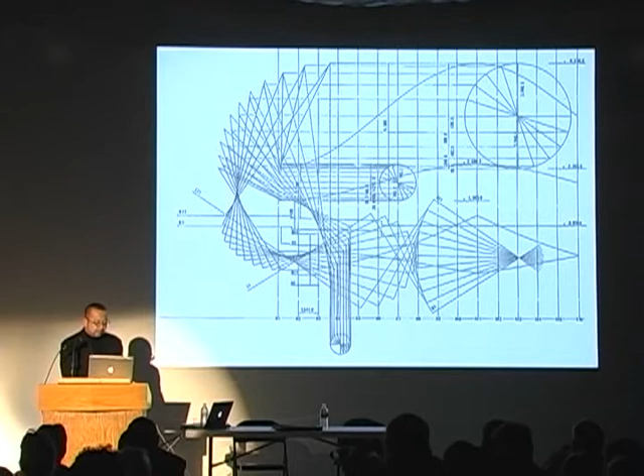And this is a drawing to form the shape of the handrail, let's say. So the bridge became sort of like a landscape created by geological activity.

So this is how it's located. Many people like it, but many people also hated this bridge. So I'm not sure if it was quite a successful project or not.

The other project is the interior of a restaurant, completed in 1999. This restaurant is located on the second floor of the building. The owner wanted to have a facade which is unique so that people will be attracted to come in. But since he doesn't own the building, he couldn't do the facade. So we proposed to do some sort of interior facade to enhance the experience of guests walking along the passage to the table. So this is what it is.

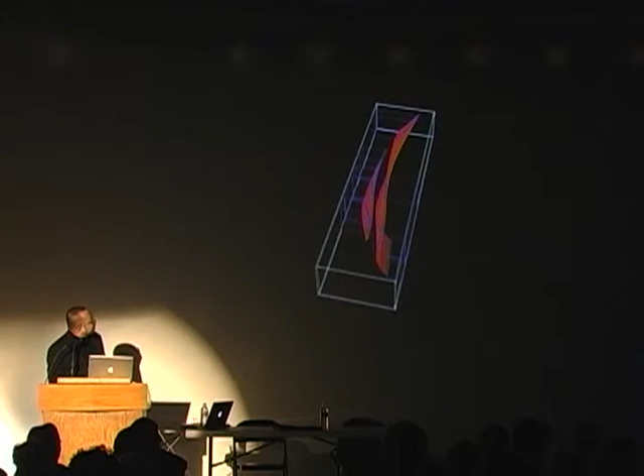And again, this is a diagram. We placed the corridor in the middle, and then there's lots of function located around it, and there's like a kitchen space and restroom and bars, etc. And because of the size of the space required, the corridor started to be curved, and then there's existing piping and structures, so the whole wall had to be kind of warped. And this is how we generated this kind of landscape of the wall.

And this is a drawing showing how we actually define the wall.

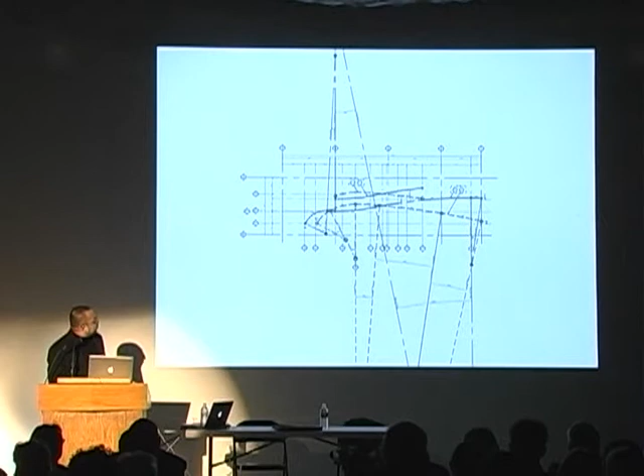And this is an entrance, and you were walking in there, and then there is a bar. The restaurant was quite a big success, but the problem was you feel already drunk before you drink anything.

Building type — just like a standard step for dancers, building typologies are a very effective tool for designing public facilities in which the identity of the end users is not known. However, over-reliance on them will ultimately restrict individual freedom of action, so they must not be the only models. Typologies may be an expedient starting point for design, but they are not the endpoint.

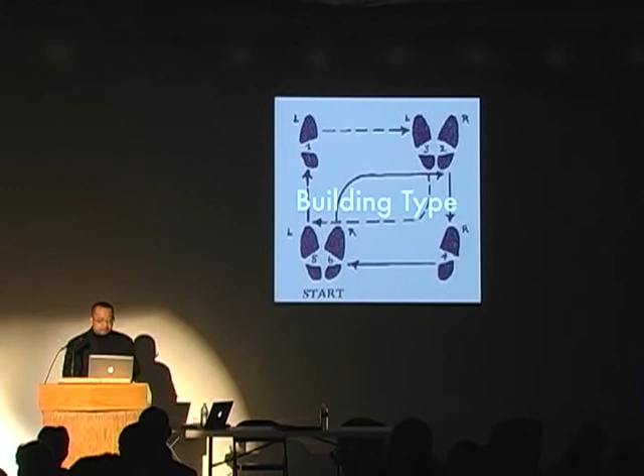So far, in designing a public space, an important point is to create a place that accepts a variety of activities by shifting pre-existing typology. The uniqueness or the vitality of the dance can be produced by an improvisation when you get rid of the standard.

So this is the Miyagi Stadium, and this is the reason why I left LA. Its design was done in 1992 and construction completed in 2000. It is a multi-purpose stadium for many kinds of sports, but it was built to have a World Cup in Japan. As you know, I'm a big soccer fan, so I was very happy when we got this project, because Japan lost against Turkey here in this stadium, in front of me.

The main concept of this stadium is a fusion of landscape and architecture. Since ancient times, the main function of the stadium typology has been to allow the maximum number of people to witness the event they contain, giving them the characteristic of centripetal closure. Additionally, a high priority for building performance at large-scale events is how to move people safely and according to plan.

And this aspect has gained even more importance today. However, the importance of everyday events that occur in modern public space is also increasing. In order to revitalize this kind of small event, the issue is now how to make an institution more open and free. In this project, for an architecture typology with an essentially closed character, the aim was to propose an open place without losing any functionality.

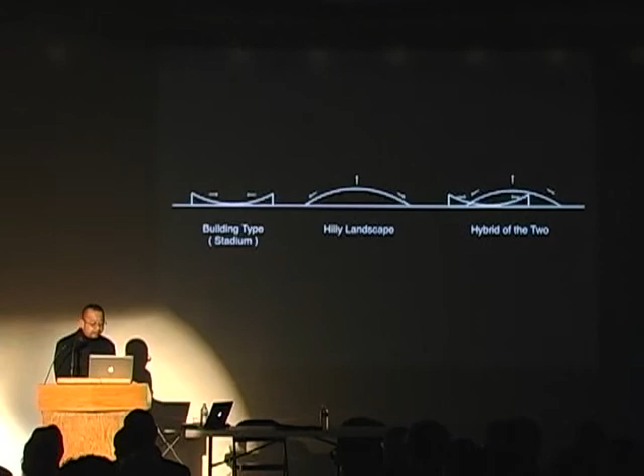So this is a photo. As you can see, the stadium is really fused into the hill. Sorry, there's more green now, but this photograph was taken a long time ago. This hill was designed as a kind of park where people can walk or have a picnic, and this function of the park was extended through the stadium with this skywalk. And because of the configuration, the structure of the backstand is basically lying onto the earth, so that we could save a lot of money.

And this is a drawing to show how the landscape can be combined with the geometry of the building. So this is what we did — we couldn't get these projects, too bad. And as you can see, the geometry of the landscape is sharing the same geometry with the building.

And this is a drawing. Okay, the roof, main entrance to the stadium. You can see how big the stadium is — this is a human, so. This is the interior racing track.

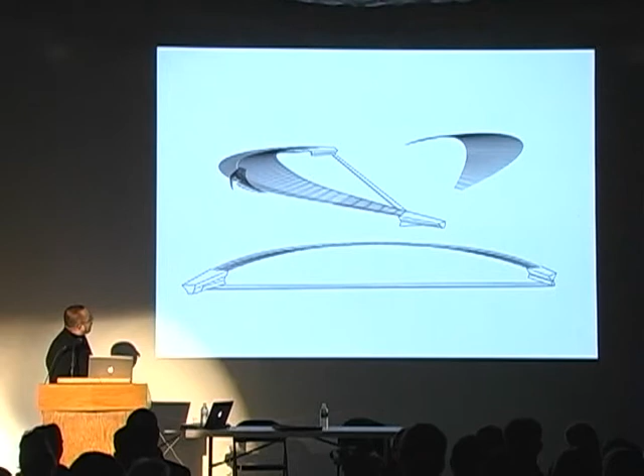So the roof of the backstand has a form that follows the overall organization, but the main stand has a kind of roof which flies over the structure and sticks out to the landscape. This becomes the main motif of the stadium.

Night view. After this stadium, we were wondering about the importance of doing public buildings, because this kind of big event doesn't happen so much. After 2002, nothing big happened in the stadium we designed, so we were kind of depressed. Then we got this commission, so we took a totally different approach.

This small facility fuses an auditorium and community center for a small town in Kyushu, in south Japan. I think it's important to define the proper size and program in designing a small public facility like this. In Japan, many public buildings end up costing too much to build and maintain, and aren't used so much.

But the biggest problem is that some of them exist totally disconnected from the surrounding community. The aim of this project was to make a compact, high-efficiency box that allows multiple usage. I wanted to get away from architecture consisting of a series of rooms corresponding to each function.

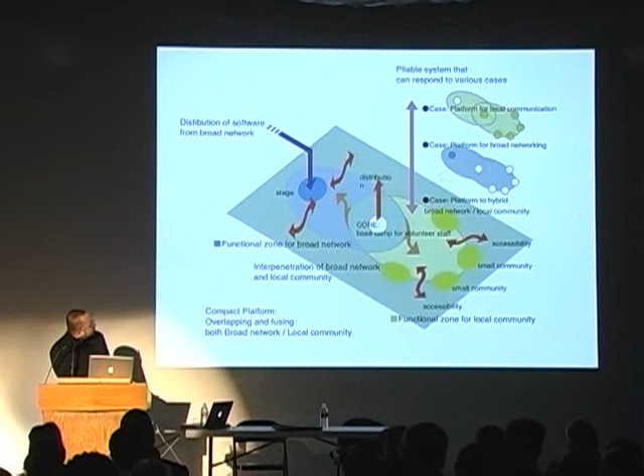Conceptually, we wanted to create a very open box without division into rooms, but planted with the seeds of many different activities. This is an activity diagram, so you can see that sometimes the auditorium function takes over everything, sometimes the community hall function takes over everything, or they share the space.

This is the plan. This is a diagram showing the generation of the form. The space of the building is a combination of one big space where all the main activities are focused.

And then a collection of smaller volumes for the various sub-functions. Those small volumes were fused into the main volume. Then these spaces are enveloped with wooden walls shaped like gills of fish, resulting in a continuous, gentle articulation of the single box.

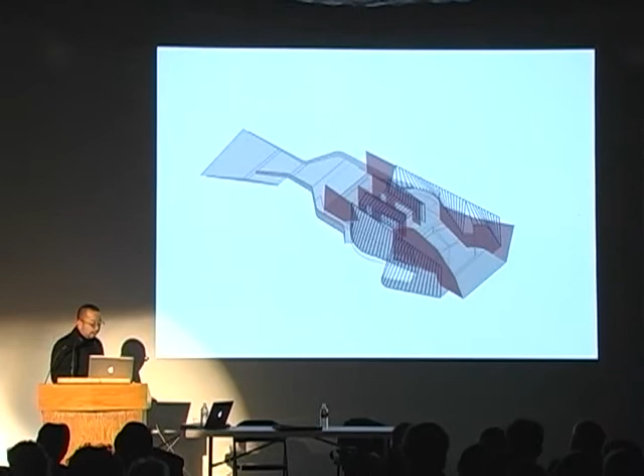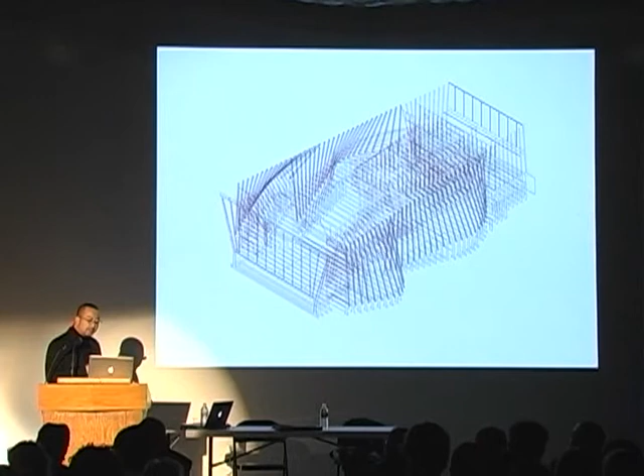So this is a model, and this is a drawing showing the structure. The wooden frames, transforming their shape gradually, stand at intervals of about 90 centimeters to create this complicated form. I'm always interested in the form of space that one principle generates by projecting a variety of conditions.

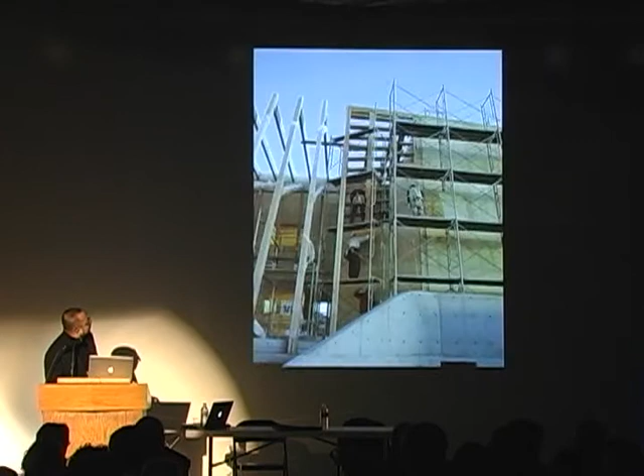This is the drawing of the frames, and this is the construction photo. These are laminated pine wood, and they are just assembled together on site. So now it looks high-tech, but it's not.

It's not a big building at all. The capacity of the auditorium is about 200, so it's very small. But it's interesting to see something like this happening. It's not an auditorium for official events or anything—the way they use it is very informal.

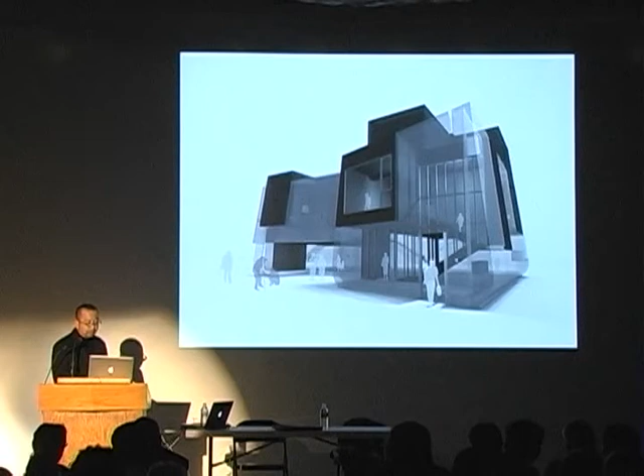So this house comprises the following fields: one, the family common area, then private rooms—private rooms were minimized—then the office for a non-profit organization. This NPO provides environmental therapy for children with mental disorders.

Then it was all wrapped with this concrete structure to support the entire structure up in the air. It also creates a buffer zone that could be open to many different activities, like mental therapy, play therapy, or local meetings. He said he actually wants to use this space for a local election campaign and also a party for high school girls—I don't know what he meant.

But I think it's a very crazy idea. Then I realized it does represent the condition of houses in Japan right now—urban functions are brought into the interior of the house. In other words, the house expands into the city, and the boundary between private and public becomes very vague. I'm not showing this completed because he has trouble persuading his family, since everybody is against it.

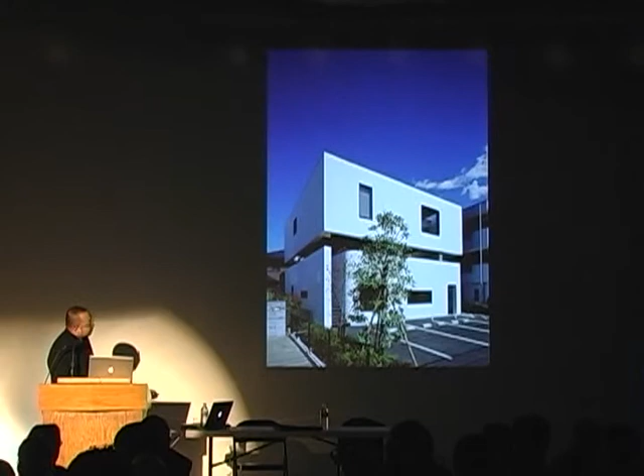So instead, I can show you this house. This house is basically designed with a similar concept to Shumai, the Chinese dumpling. This house is now called the Whopper, and you can see why. This space has a children's hospital, and doctors are living upstairs.

And again, a kind of buffer zone which could be open to the public is created on the second floor. This is how it's been done.

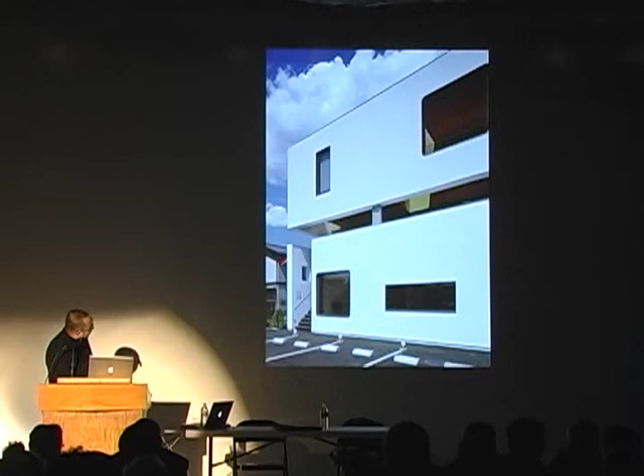Actually, it has a very interesting structure. This is a concrete structure, and the third floor is supported by these steel columns, so that the concrete volumes are floating above the air. The second floor exists in between. Well, this is what it is.

The body, the third keyword. The body is at present the only interface for people to directly engage their environment. To perceive architecture through the conceptual filters of institution and program merely reaffirms predetermined meanings and escalates the difficulty of decoding the meaning of the place through the body. On the other hand, even if the program and context are stripped away, the direct presence of the body, the form of architecture, is sufficient to generate the meanings of the place in its dialogue with the body.

This is the exhibition of our work at Gallery Ma in Tokyo. When we think about an architecture show at a gallery, there are always models and drawings filling up the space, but those are just representations of the architecture, which is not there. The show reveals the absence of architecture against its purpose.

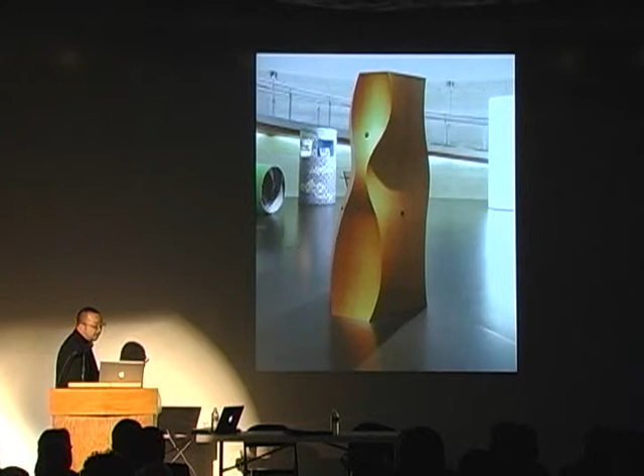This is the object we had to design for the exhibition called Extremely You last year. It was a strange exhibition because we had to work with a Spanish architect together to produce a cylinder and cube, which would represent the architecture we think. We worked with Mansilla and Tuñón from Madrid, and their proposal was this box.

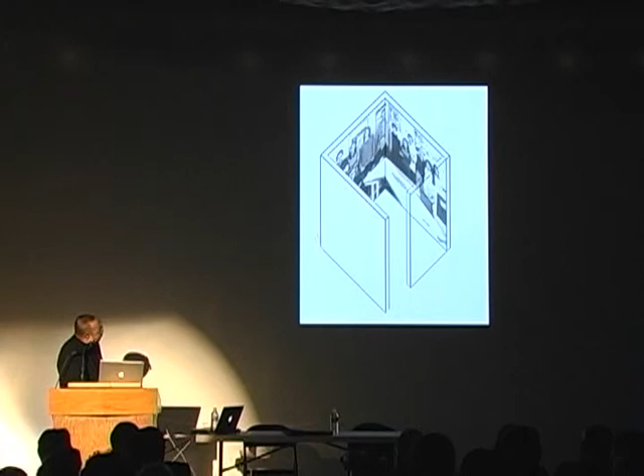This is a photograph of the people working in both offices, and the idea was to show everybody behind the scenes. I wasn't sure it was a good idea, but they insisted on sharing it, so I had to come up with different objects with the same idea.

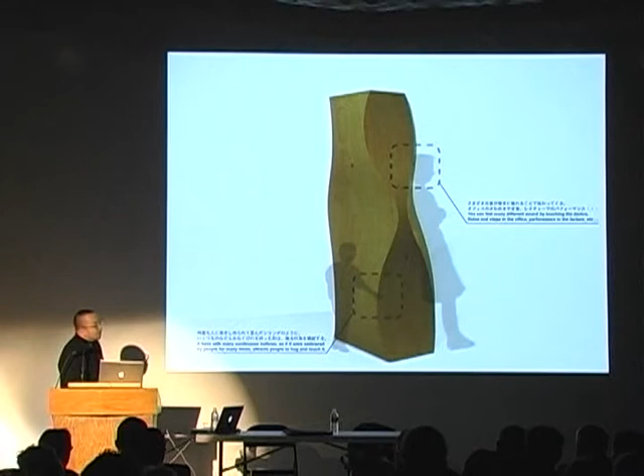So what we did was, instead of showing the scene behind visually, we decided to show it without any visual images, but with sound. This is the object, and we put in this special kind of speaker, called a bone conductor. In order to hear the sound, you have to put your skull against this conductor.

So we made a recording of the office — me shouting at people, or presentations to the client — and it's all there. Also, in order to hear the sound, people have to hug this object, so the object had to look nice, attractive enough to be hugged.

So this is what it is, and people are actually hugging it. I like this image because, in a way, she is experiencing space by hearing sound and also feeling the sensation of the surface of this object. In a way, she is fusing into this kind of environment, and it represents the kind of architecture I'm very curious about.

Soft boundary. The fundamental aspect of architectural design is to define a place by drawing a boundary line. However, we are neither designing submarines nor designing for a utopia separated from its surroundings and environment. So the boundary line should not be something separating inside and outside completely. It should be soft enough so that it can mediate each adjacent condition according to the situation.

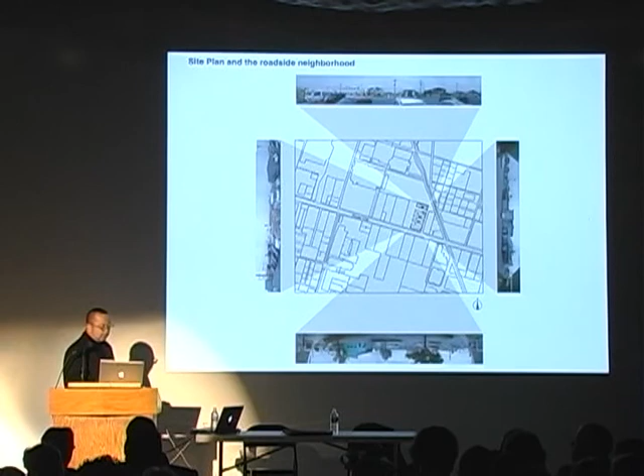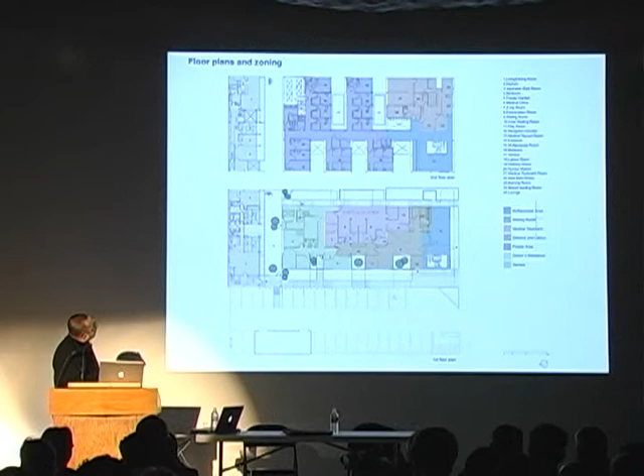I thought that's the place where the child should emerge for the first time in this world. This is how we did it, with just a few little techniques. First, a huge second floor to protect the ground floor. Also, the openings are controlled so you don't directly look outside. This is the ground floor and this is the second floor, with all the bedrooms upstairs, plus a delivery room, waiting room, and a doctor's area. If you're in this room, you're looking into this courtyard, but you'll also be able to see the city through the gap between the volumes.

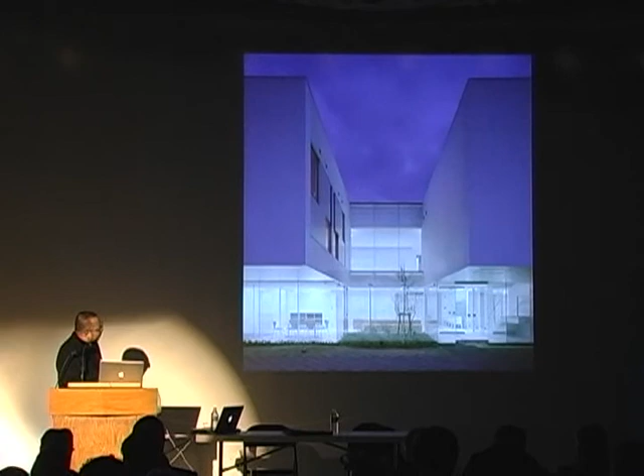The waiting area was pretty much exposed to the parking lot. We didn't have much space, so we couldn't avoid that. So in order to give some distance between the waiting area and the parking lot, we inserted a visual buffer zone: two layers of glass with a courtyard in the middle, so you don't directly look at the ugly parking lot. You can see here, there's one line of glass, and then another line of glass there.

Some little details: babies, mothers, and a nurse. They looked happy, but actually they're actors, for an ad. And this is a waiting room, where sometimes they have a smorgasbord lunch style. They also give lectures to new mothers, because new mothers tend to be very nervous about feeding and nursing babies.

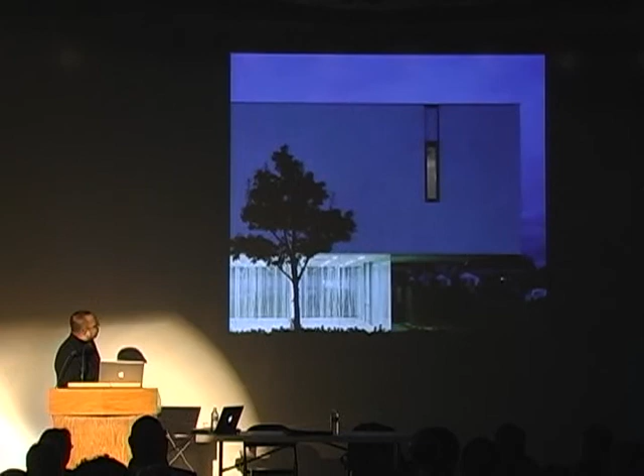Night view, with the volumes floating above the glass cube.

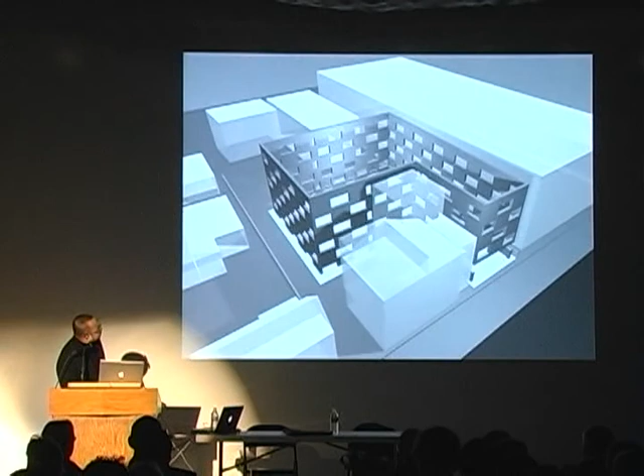This is the other building: a small office and factory for the production of prosthesis, artificial legs and arms, completed in 2004. This is the building we designed. It's located on a very typical site in Japan, called a flagpole site, in the center of the city. The walls were built tracing the site boundaries to achieve the maximum floor area under the building height restrictions. The structure has no interior columns, in order to make a free and flexible space inside.

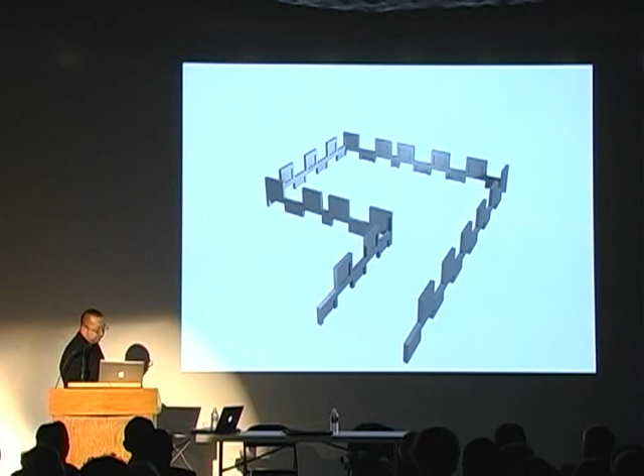Because of the condition of the site, we applied a special structure. The exterior structural wall comprises precast concrete panels that are stacked up and then post-tensioned, like this. The whole floor is supported by these precast panels. Since there's a hole in the middle, we also had to have a beam to hang all the floors from above. This arrangement gives the panels and openings a uniform checkerboard pattern, placing windows just above the floor and just below the ceiling. This window placement controls the view of the disordered surroundings, creating a boundary that softly separates this place from the outside.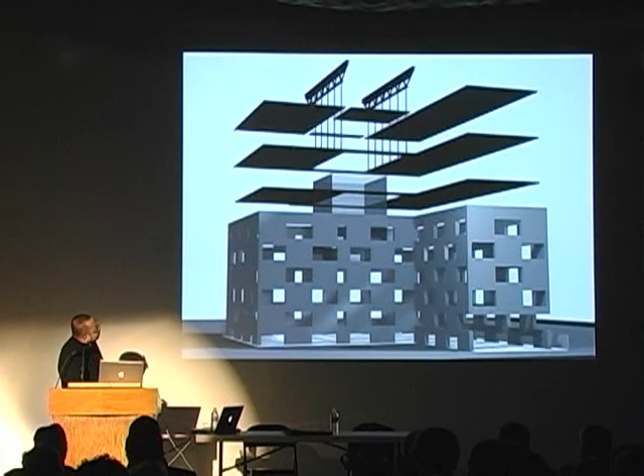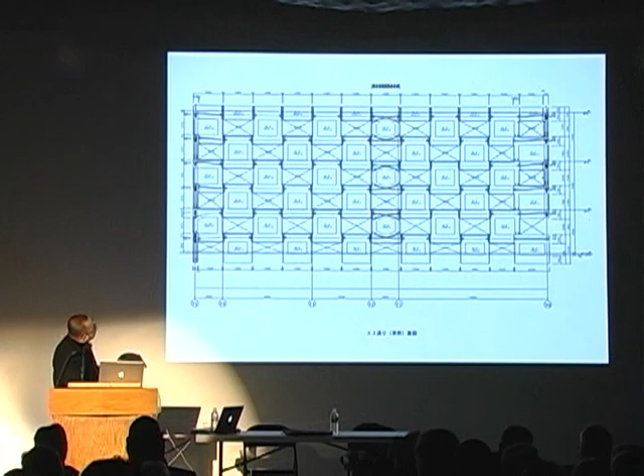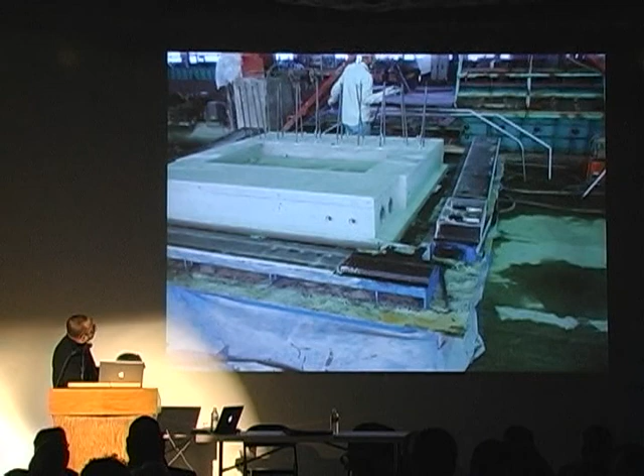This is a drawing showing how we put the steel rods through the panels, and this is how it's been done. Again, the construction: this is a steel form, rebars, then everything is cast, making the panel. The panel was then sent to the site — you can see how tight the site is — and then assembled together. This is very difficult to do; you cannot create this kind of precast concrete so precisely. We had a lot of trouble, but we did it anyway.

The glass cube was basically hung from this column, from this beam, creating a sort of interior courtyard. This is also a piece articulating the plan so that people are separated but can still feel each other, creating a sense that they are sharing one space and working together in one company, I guess. This is the factory part — you can see the placement of the window.